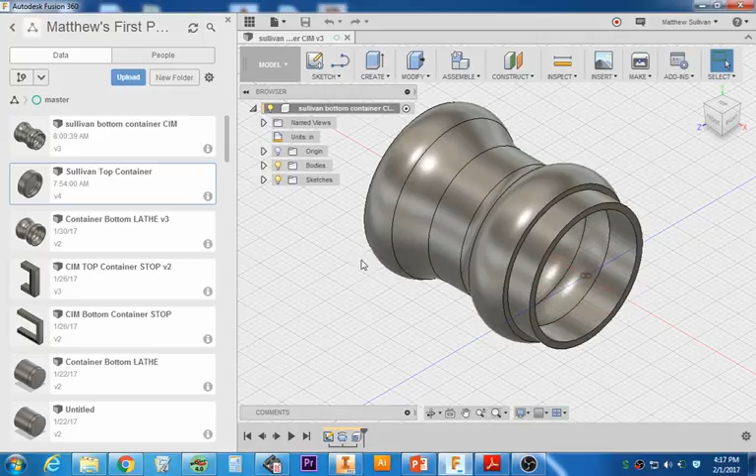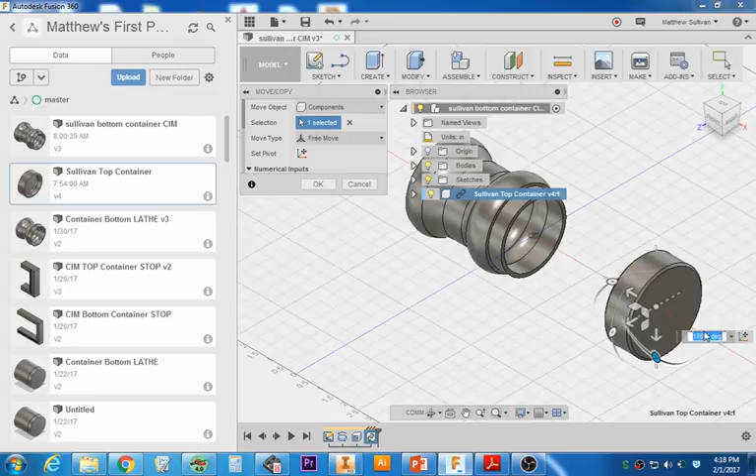Make sure that when you have these features right here, these arrows, that we can move it out. We're going to move it out, and we are going to go ahead and rotate it. Mine is kind of backwards, the opening is facing the same way as the opening here, so we're going to rotate it around 180 degrees. You can see right there, it went 180 degrees, and now it's aligned.

I'm going to go ahead and select OK. The very next thing I'm going to do is inspect both these parts. So in order to inspect them, I'm just going to double check I did everything right by selecting the inspect option.

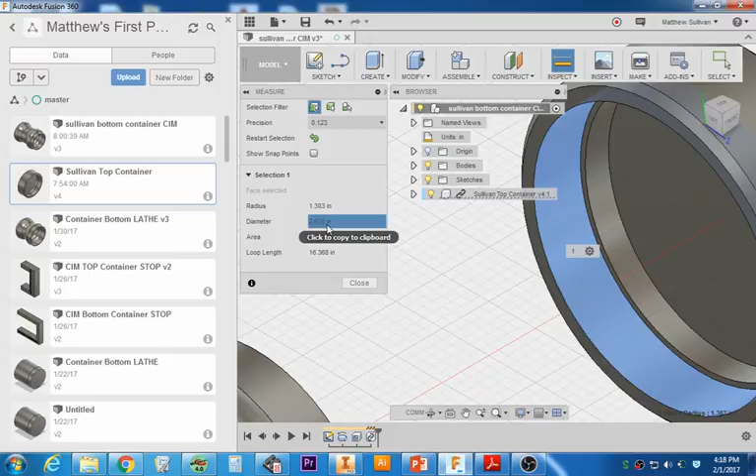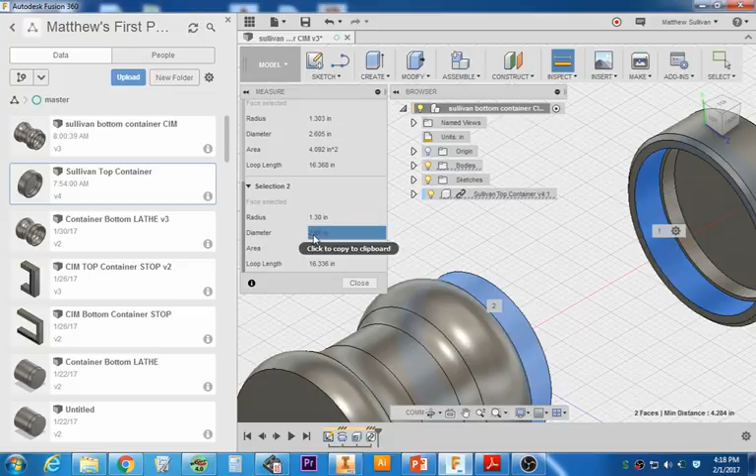I'm going to select the inside diameter here, and I have 2.605. Hopefully if I did this right, my other feature here is going to be just a little bit smaller. So selection 1 is 2.605 and selection 2 is 2.6. So 2.605 is a little bit bigger than 2.6. This is feature 1, it says 1, and this is feature 2, so we can compare them right here. Therefore, this feature will fit over the top of this one, so we are in good shape.

I'm going to close out of this and go into my assembly, and assembling is super easy. The first thing I'm going to do is use a joint. I'm only going to do one feature, one constraint. Why am I only going to do one constraint?

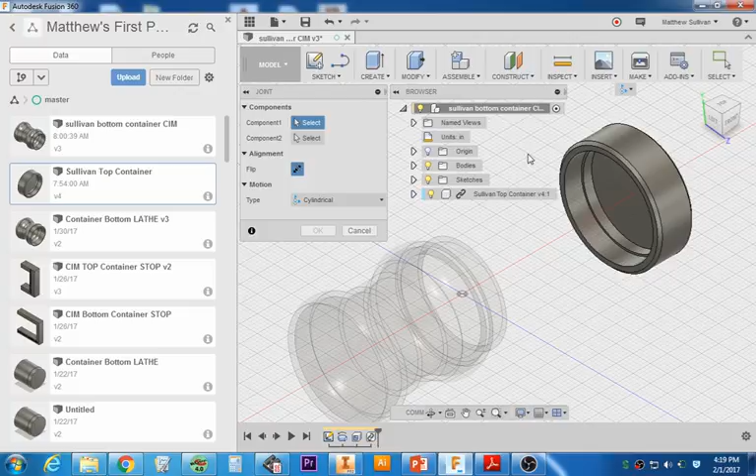Well, this can rotate and move in and out on this. So the only two areas I'm going to select, I'm going to zoom in on this face here. I'm going to select that face. I'm going to go to my component 2. Sometimes it automatically does it for you, and select your component 2.

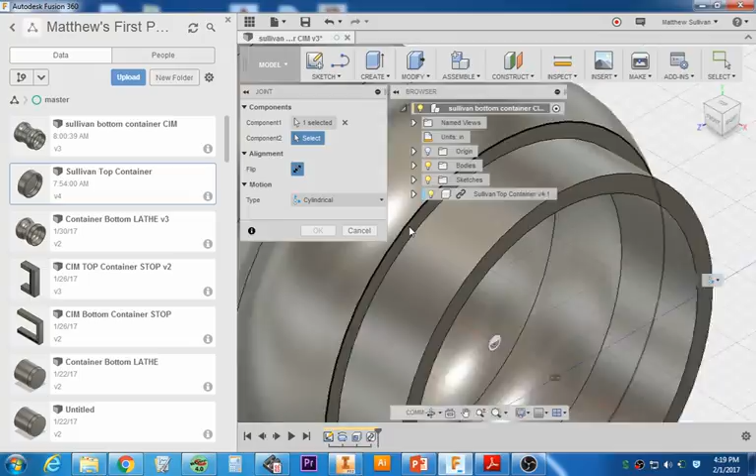Notice it says now one selection. There's no selection here. I'm going to zoom in right about here, and select exactly where these two pieces can go. It's going to spin it all the way around a few times, going in and out, to make sure there's no clearance issues. If it goes all together and there's no issues, you can go ahead.

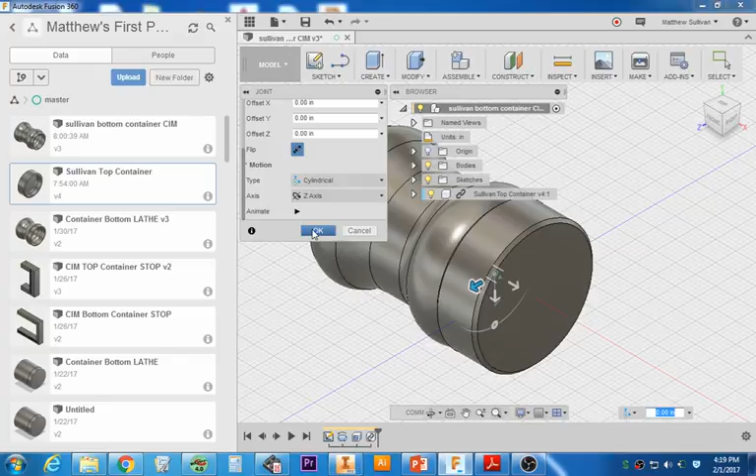This is what it's going to look like when it's all closed up when we're finished with this. It's a nice thing to do. It's always a good idea to do an assembly to make sure that everything fits together nice and neat, and double check that you've inspected both the features.

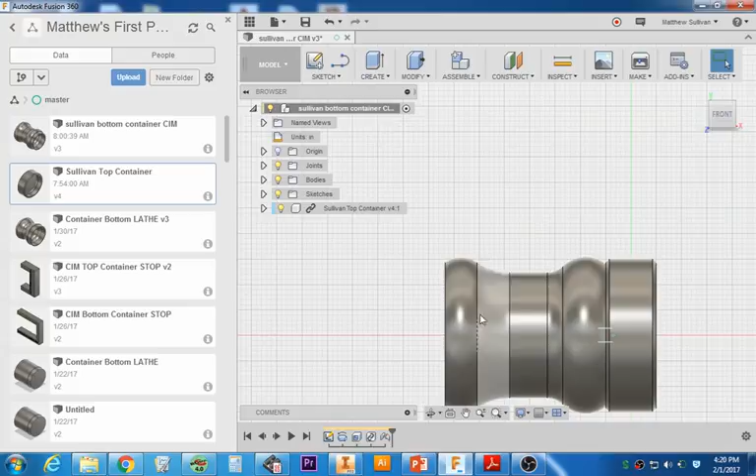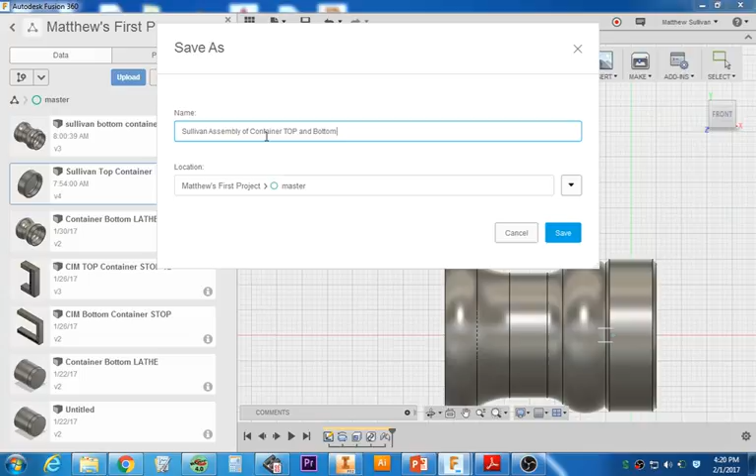Now that you've done this, you need to save as. You cannot just exit out. You have to save as, put your name, assembly of container, top and bottom. Select save, and your feature should be right about here. You have the top and bottom assembled, and now you're ready to start manufacturing your parts.